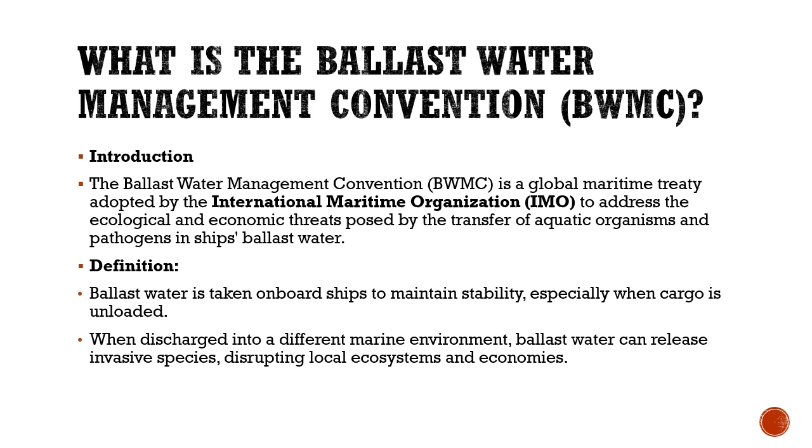What is the Ballast Water Management Convention (BWMC)? Introduction: The BWMC is a global maritime treaty adopted by the International Maritime Organization (IMO) to address the ecological and economic threats posed by the transfer of aquatic organisms and pathogens in ships' ballast water. Definition: Ballast water is taken on board ships to maintain stability, especially when cargo is unloaded. When discharged into a different marine environment, it can release invasive species, disrupting local ecosystems and economies. Objective: The primary goal is to prevent the spread of harmful aquatic organisms and pathogens through ballast water discharge, achieved by mandating ships to either exchange ballast water mid-ocean or treat it to meet specific environmental standards.

Why was it needed? Ecological threats: the introduction of invasive species can harm native marine life, disrupt ecosystems, and threaten biodiversity. Example: zebra mussels in the Great Lakes cause significant ecological and economic damage. Economic costs: invasive species can impact fisheries, infrastructure, and local economies. Human health risks: ballast water can carry waterborne diseases like cholera to new regions. Global impact: the BWMC establishes uniform regulations for all member states, promoting sustainable maritime practices and protecting marine environments worldwide.

Adoption milestone: The BWMC was adopted on the 13th of February 2004, after extensive consultations with IMO member states, scientists, and environmental organizations.

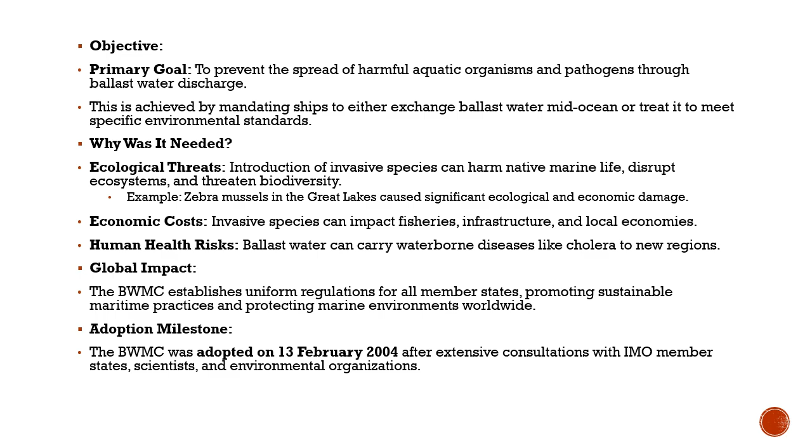History and key dates of the BWMC adoption. Date of adoption: the 13th of February 2004, adopted during the International Maritime Organization (IMO) diplomatic conference, a response to growing concern over the global transfer of harmful aquatic species through ships' ballast water. Ratification milestone: the BWMC required ratification by 30 countries representing 35% of global merchant shipping tonnage to enter into force. This was achieved on the 8th of September 2016, with 52 countries representing 35.14% of the world's tonnage ratifying the convention. Entry into force: the convention officially came into effect on the 8th of September 2017, one year after reaching the ratification threshold. Ships were required to start meeting the D1 ballast water exchange standard from that date.

Amendments to the BWMC: 2018 - IMO introduced amendments to clarify compliance and inspection processes. 2019 - additional amendments addressed the implementation schedule for ballast water treatment systems (D2 standard), and the transition period from D1 to D2 was extended for older vessels to ease compliance. 2020 - IMO revised guidelines for testing ballast water management systems (BWMS), with enhanced focus on performance and sustainability of treatment technologies.

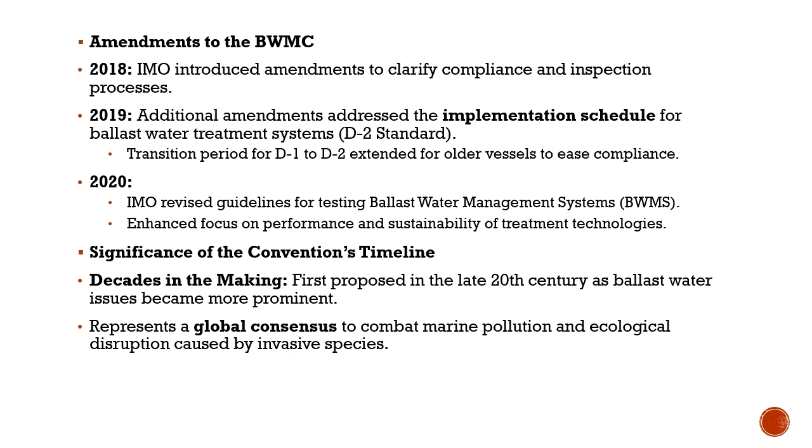Significance of the convention's timeline: decades in the making, first proposed in the late 20th century as ballast water issues became more prominent. It represents a global consensus to combat marine pollution and ecological disruption caused by invasive species.

Scope of the Ballast Water Management Convention (BWMC). Applicability: the BWMC applies to vessels engaged in international voyages to regulate ballast water discharge and prevent the transfer of invasive species. Who does it apply to? Commercial vessels designed to carry and discharge ballast water, including cargo ships, oil tankers, container ships, and bulk carriers - this includes both new and existing vessels. Global coverage: the BWMC sets international standards for all ratifying member states, ensuring uniform compliance.

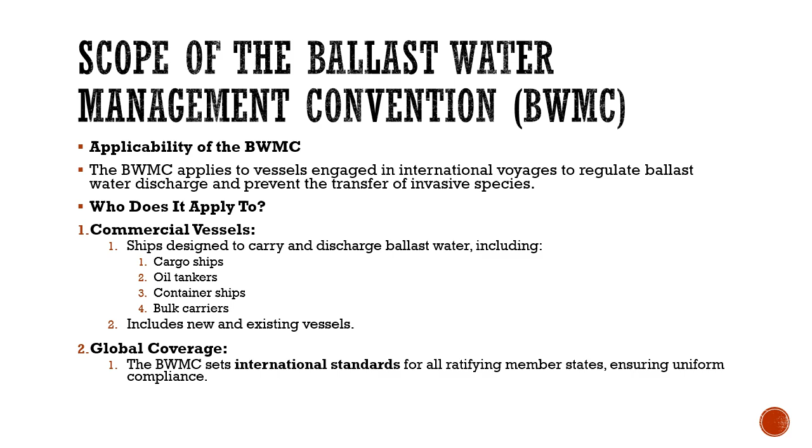Who is exempt? Ships operating exclusively in the waters of one country (domestic voyages); warships, naval auxiliaries, and state-owned vessels used for non-commercial purposes; vessels with permanently sealed ballast water tanks not subject to discharge; and ships that discharge ballast water to a reception facility meeting IMO standards.

Goals of the BWMC: protect marine environments by minimizing ecological harm, preventing the spread of invasive species, promoting sustainability, and ensuring maritime activities do not disrupt ecosystems. It also aims at standardizing compliance by establishing clear rules for ballast water management globally. Legal and geographical scope: jurisdiction applies to ships operating between countries that are signatories to the BWMC, enforced by Port State Control (PSC) in member states. Ships can be inspected, and penalties may be imposed for non-compliance.

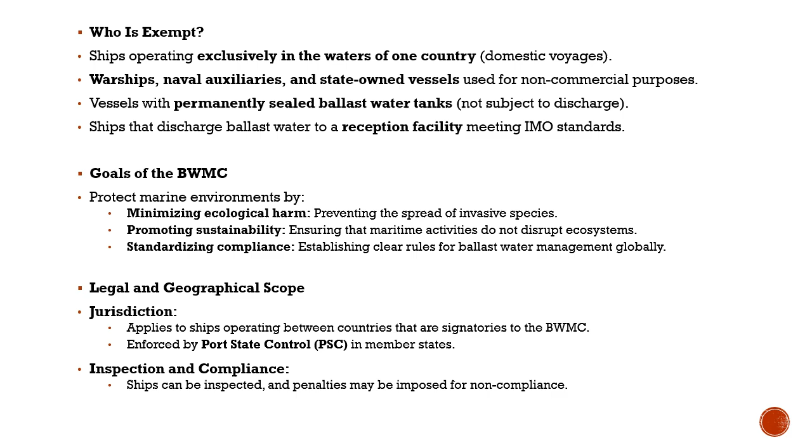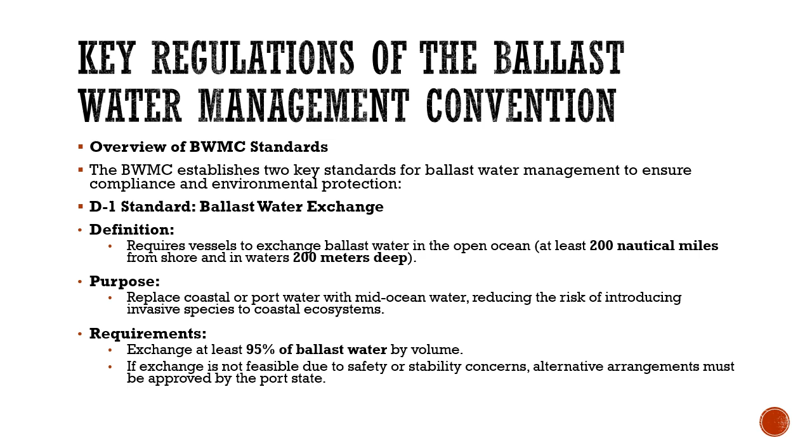Key regulations of the Ballast Water Management Convention. Overview of BWMC standards: the BWMC establishes two key standards for ballast water management to ensure compliance and environmental protection. D1 standard - ballast water exchange: requires vessels to exchange ballast water in the open ocean, at least 200 nautical miles from shore and in waters 200 meters deep. Purpose: replace coastal or port water with mid-ocean water, reducing the risk of introducing invasive species to coastal ecosystems. Requirements: exchange at least 95% of ballast water by volume. If exchange is not feasible due to safety or stability concerns, alternative arrangements must be approved by the port state.

The D2 standard defines ballast water treatment, requiring ships to treat ballast water to meet specific environmental standards before discharging. Performance criteria set maximum concentration limits for viable organisms: for organisms 50 micrometers and larger, less than 10 organisms per cubic meter; for organisms between 10 and 50 micrometers, less than 10 viable organisms per milliliter.

There are also strict limits on harmful bacteria such as cholera, E. coli, and intestinal enterococci. As for the implementation timeline, new vessels must comply upon delivery, while existing vessels must retrofit their systems within specified timelines as per IMO amendments.

Compliance and documentation requirements include the Ballast Water Management Plan (BWMP) — ships must have an IMO-approved plan detailing procedures for ballast water exchange or treatment. The Ballast Water Record Book must record all ballast water operations, including intake, exchange, treatment, and discharge. Additionally, the International Ballast Water Management Certificate is issued by flag states to demonstrate compliance with BWMC standards.

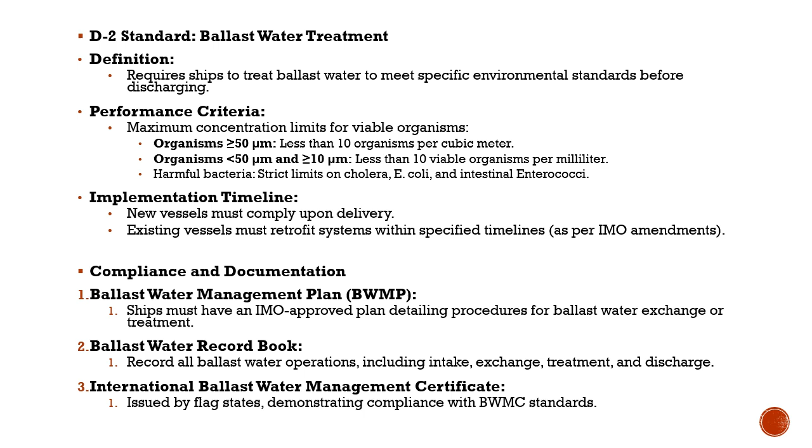Port State Control (PSC) inspections cover the scope of verifying a valid BWMP and ballast water record book, along with sampling of ballast water discharge to ensure compliance with D2 standards. Penalties for non-compliance include fines, detention, or denial of port entry for ships violating regulations.

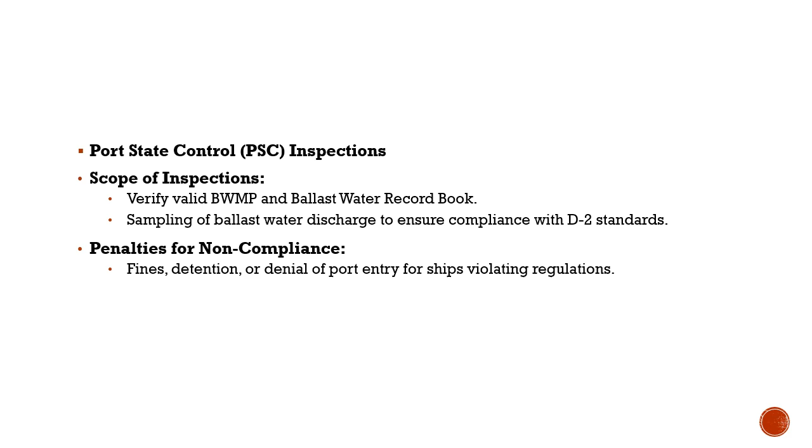IMO requirements for ballast water management. Overview of IMO's role: the International Maritime Organization (IMO) establishes and oversees regulations under the BWMC to ensure global compliance and uniform standards for ballast water management.

Key IMO requirements include an approved Ballast Water Management Plan (BWMP). Ships must have a plan approved by the flag state detailing procedures for ballast water exchange or treatment, safety measures for crew and environment during ballast operations, and emergency procedures in case of equipment failure. The BWMP must be accessible on board for inspections.

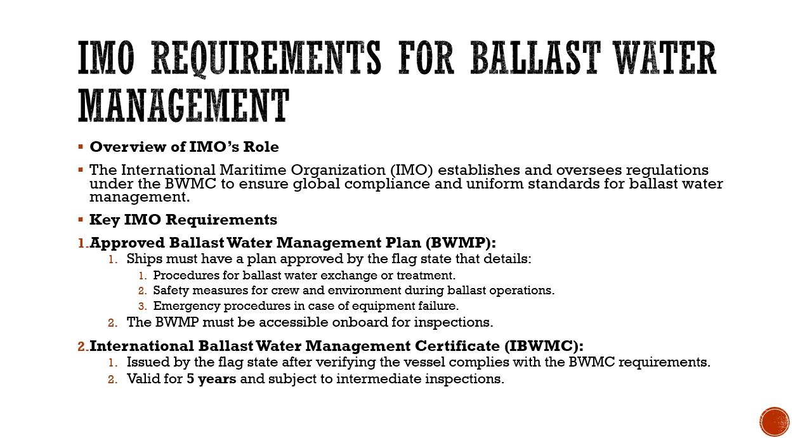The International Ballast Water Management Certificate (IBWMC) is issued by the flag state after verifying the vessel complies with BWMC requirements. It is valid for 5 years and subject to intermediate inspections.

The Ballast Water Record Book (BWRB) must document every ballast water operation, including ballast water intake and discharge, ballast water exchange or treatment, and emergency procedures and deviations, if any.

Treatment technology approval requires ships to install and use an IMO-approved Ballast Water Treatment System (BWTS) to meet the D2 standard. The system must pass rigorous testing for efficacy, reliability, and environmental safety.

Inspection and enforcement falls under Port State Control (PSC). Port authorities can inspect ships to ensure compliance, and sampling of ballast water discharge may be conducted to verify adherence to D2 standards.

Penalties for non-compliance include fines or detention, and denial of port entry. Regarding the implementation timeline, new ships must comply with D2 standards upon delivery, while existing ships comply as per retrofit schedules, marking the transition from D1 to D2.

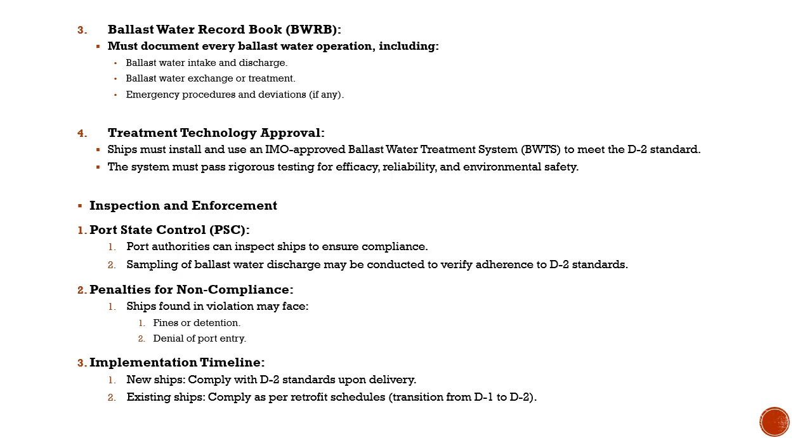A detailed explanation of the D1 standard: ballast water exchange. What is the D1 standard? The D1 standard of the Ballast Water Management Convention (BWMC) requires ships to conduct a ballast water exchange during their voyages. This process aims to replace coastal or port water, which may contain harmful organisms, with open ocean water, reducing the likelihood of transferring invasive species to new environments.

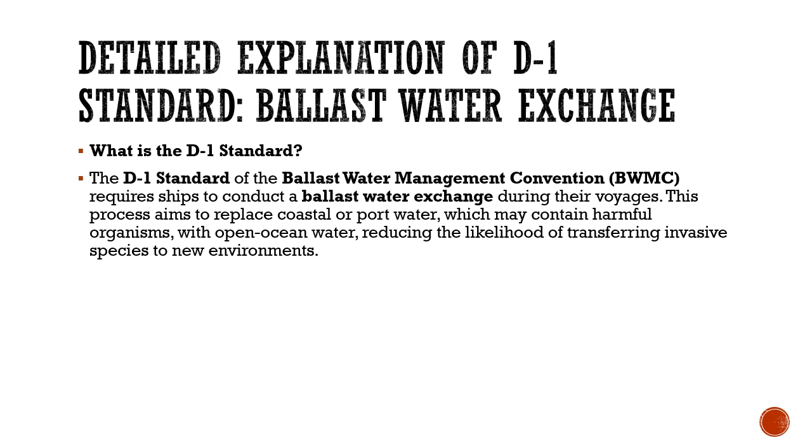Ballast water exchange process and requirements. Location: the exchange must occur at least 200 nautical miles from the nearest land, mid-ocean, in waters that are 200 meters deep or more. Volume: ships must exchange at least 95% of ballast water by volume.

The remaining 5% can be treated, as it is often contaminated with debris, sediments, and organisms.

Techniques for ballast water exchange include flow-through exchange, where water is pumped out from the ballast tanks and new water is simultaneously taken in. This is typically used when the vessel is in open waters, ensuring that the ballast tanks are fully flushed.

Sequential exchange involves emptying ballast tanks in sequence and then filling them with open ocean water, replacing most of the coastal ballast water. Mixed water exchange is a hybrid technique using a combination of flow-through and sequential exchange methods.

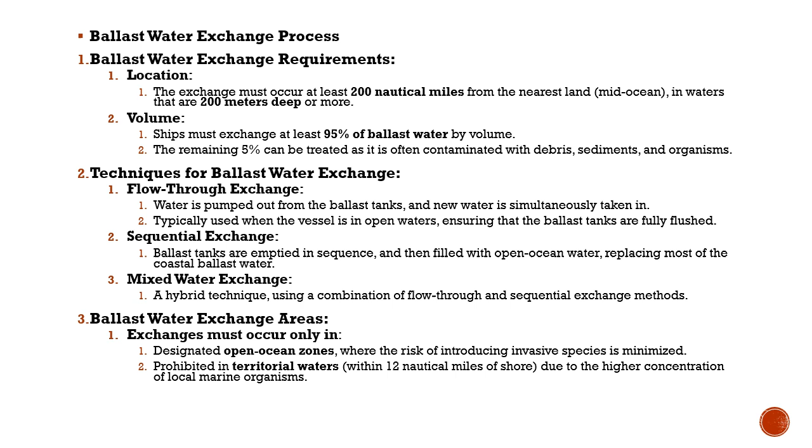Ballast water exchange areas: exchanges must occur only in designated open ocean zones, where the risk of introducing invasive species is minimized. It is prohibited in territorial waters, within 12 nautical miles of shore, due to the higher concentration of local marine organisms.

Who can use the D1 standard? Vessels eligible for D1 compliance.

Existing ships. Vessels built before the entry into force of the BWMC, the 8th of September 2017, can continue to use the D1 standard until they are required to install a treatment system or meet D2 standards based on their retrofit schedules.

Ships operating in specific conditions. Some vessels that operate exclusively in one country's waters, domestic voyages, or those that have sealed ballast tanks may be exempted from the D2 treatment system but are still required to exchange ballast water according to the D1 standards.

Restrictions on use of D1. Ships on domestic routes. Ships operating only in national waters that are not involved in international trade may be exempt from the D1 requirement, but international vessels must follow the D1 exchange process.

Limited by safety. If the ballast water exchange process would compromise the safety or stability of the vessel, alternative arrangements, for example, using an approved ballast water treatment system, may be allowed with port state approval.

Advantages and challenges of the D1 standard. Advantages: effective in reducing invasive species. The exchange process helps to significantly reduce the risk of transporting harmful aquatic organisms to new locations.

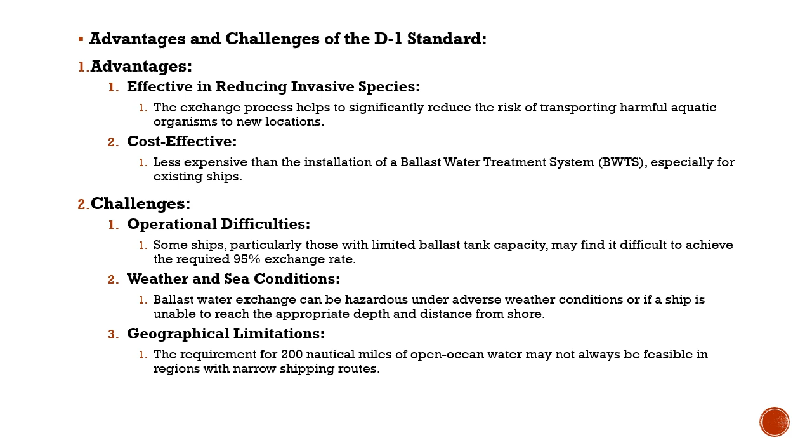Geographical limitations. The requirement for 200 nautical miles of open ocean water may not always be feasible in regions with narrow shipping routes.

Detailed explanation of D2 standard, ballast water treatment. What is the D2 standard?

The D2 standard of the Ballast Water Management Convention, BWMC, sets the requirements for treating ballast water before it is discharged into a new marine environment. The goal is to reduce the concentration of harmful organisms and pathogens to levels that do not pose a risk to marine ecosystems, human health, or local economies.

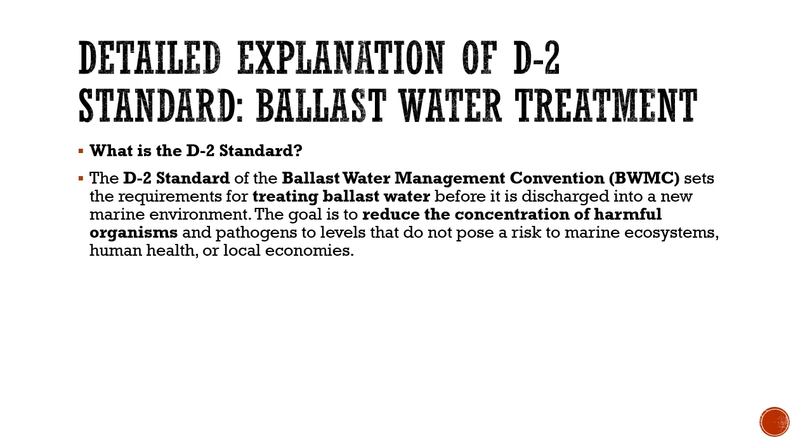D2 Treatment Requirements Performance Criteria. The D2 standard specifies the maximum permissible concentrations for various organisms and pathogens in the discharged ballast water.

Organisms greater than or equal to 50 micrometers, including zooplankton, maximum concentration 10 organisms per cubic meter. Organisms less than 50 micrometers and greater than or equal to 10 micrometers, including phytoplankton, maximum concentration 10 viable organisms per milliliter.

Harmful bacteria, E. coli, maximum of 250 CFU/100 milliliters. Intestinal enterococci, maximum of 100 CFU/100 milliliters. Vibrio cholerae, maximum of 1 CFU/100 milliliters.

Ballast water treatment systems, BWTS. Ships must install and use IMO-approved ballast water treatment systems to meet D2 standards.

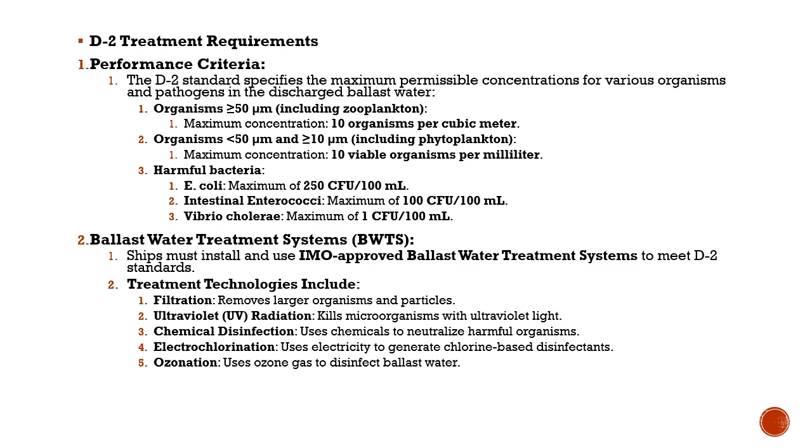Treatment technologies include filtration, which removes larger organisms and particles; ultraviolet (UV) radiation, which kills microorganisms with ultraviolet light; chemical disinfection, which uses chemicals to neutralize harmful organisms; electrochlorination, which uses electricity to generate chlorine-based disinfectants; and ozonation, which uses ozone gas to disinfect ballast water.

Compliance deadlines for D2. New ships comply with D2 immediately upon delivery from the shipyard. They must have an IMO-approved ballast water management plan, BWMP, and ballast water treatment system, BWTS, in place from the beginning.

Existing ships must install a BWTS to comply with D2 standards during the first scheduled dry docking after the 8th of September 2017, or by the following deadlines: by 2022 for ships built before the entry into force of the Convention, and by 2024 or 2027 for vessels over 400 gross tons or those subject to extensions.

Installation and operational considerations. Retrofit challenges for existing ships. Retrofitting ships with a BWTS can be expensive and technically challenging. Ships must undergo modifications to accommodate the treatment system, which may include installing new pumps, power systems, and storage tanks.

Maintenance and monitoring. Regular maintenance of the BWTS is crucial for ensuring the system's ongoing effectiveness. Operational staff must be trained to monitor and operate the BWTS, ensuring it functions within the prescribed limits for treatment efficiency.

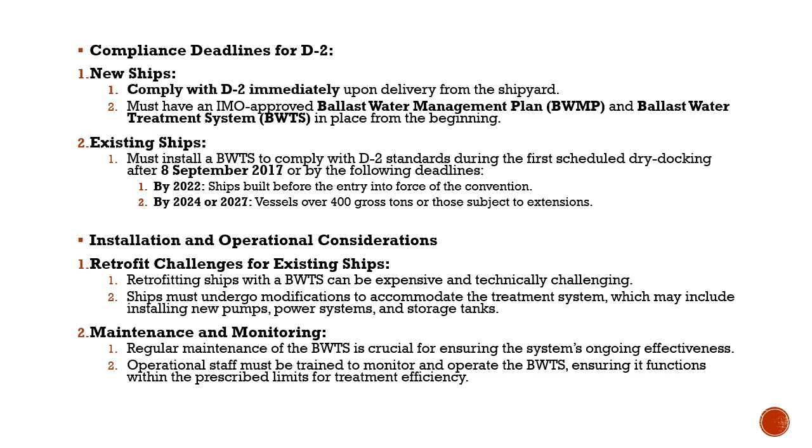Advantages of the D2 standard. Effective for reducing harmful organisms. The treatment system ensures that harmful pathogens and aquatic species are killed or rendered incapable of surviving in new environments.

Environmental protection. Significantly reduces the risk of introducing invasive species that can cause ecological and economic damage. Global standardization. Uniform international regulations prevent the risk of non-compliance in different countries and ensure that all ships meet the same standards.

Challenges of the D2 standard. Cost of technology. The initial cost of installing and maintaining an IMO-approved ballast water treatment system can be high, especially for existing ships. Technological limitations.

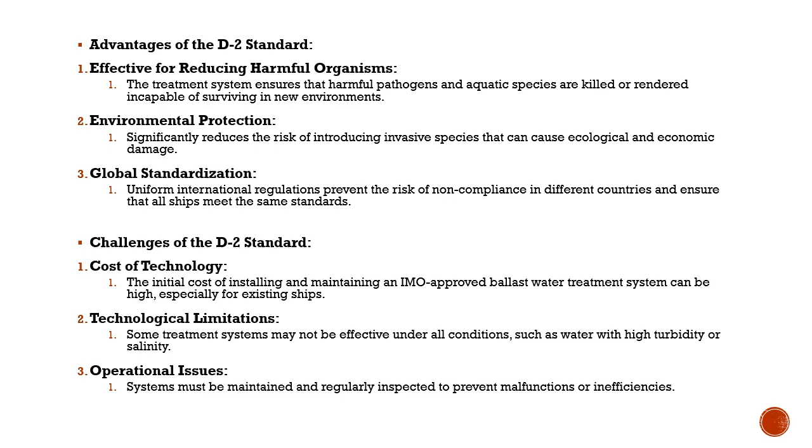Some treatment systems may not be effective under all conditions, such as water with high turbidity or salinity. Operational issues. Systems must be maintained and regularly inspected to prevent malfunctions or inefficiencies.

Challenges and emergency procedures in ballast water management. Emergency contingency measures, exemptions and extensions. Ships that cannot comply with ballast water exchange or treatment due to technical difficulties may be granted temporary exemptions or extensions. These must be approved by the flag state and port state, and the ship must provide a contingency plan for ballast water management until compliance is restored.

Port State Control, PSC, inspections. If a vessel is found to have an inoperative BWTS or is in violation of the D2 standard during a PSC inspection, immediate corrective actions will be required. The ship may be detained or fined, and further corrective measures may be required, including installation of a new BWTS or additional ballast water treatment equipment.

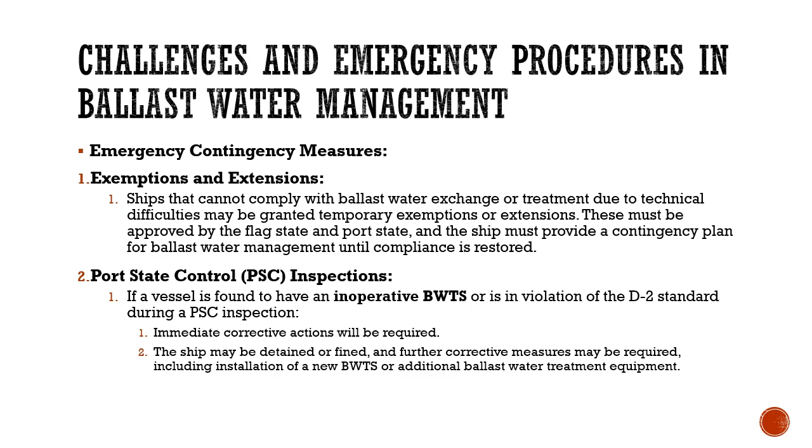Challenges in ballast water management. Operational difficulties. Space constraints. Some vessels may face space limitations when installing ballast water treatment systems, BWTS, especially older ships with less available room for additional equipment.

Efficiency variability. Ballast water treatment systems may show varying effectiveness under different operational conditions, for example, temperature, salinity, and turbidity levels. Financial and technological barriers. High costs. The installation and ongoing maintenance of BWTS can be costly for shipping companies, particularly for older vessels that require retrofitting. Technological reliability. Some treatment systems may not meet the required discharge standards in extreme conditions, causing compliance issues.

Environmental and geographical limitations. Ballast water exchange restrictions. Ships are required to conduct ballast water exchanges only in mid-ocean, at least 200 nautical miles from shore. In regions with congested shipping routes or short-distance international trade, this requirement may not always be practical. Extreme weather conditions. Adverse weather or sea conditions may make it difficult or unsafe to perform ballast water exchange, impacting compliance.

Compliance monitoring and enforcement issues. Inconsistent enforcement. Enforcement of ballast water management regulations may vary by port state, leading to inconsistent compliance across regions. Inspection and sampling challenges. Sampling ballast water to verify compliance can be difficult due to the complexity of monitoring and testing, especially for ships that use chemical treatment or electrochlorination methods.

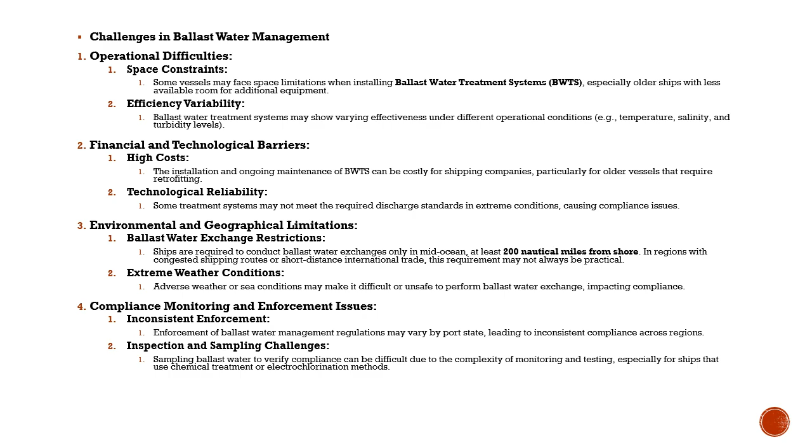Emergency procedures for ballast water management. Malfunctioning ballast water treatment system, BWTS. Immediate actions: if a BWTS is not functioning correctly, the ship's crew must immediately notify the port state or relevant maritime authorities. Alternative ballast water management procedures, such as ballast water exchange, D1 standard, may be authorized. Temporary measures: some ships may be allowed to discharge ballast water into reception facilities that are designed to handle ballast water and ensure it is treated properly before release.

Failure to meet D2 standards. If the ship is unable to treat ballast water to the required D2 standards due to equipment failure or other issues, the ship should seek immediate approval from the port state for an alternative compliance plan. Emergency treatment methods, such as additional filtration or chemical dosing, may be permitted, subject to approval.

Ballast water discharge in restricted areas. In cases where the ship needs to discharge ballast water in restricted waters, due to navigational challenges or unforeseen circumstances, the ship should follow special discharge protocols as specified by the IMO or relevant maritime authority. Notify the relevant authorities and provide a report explaining the emergency discharge situation.

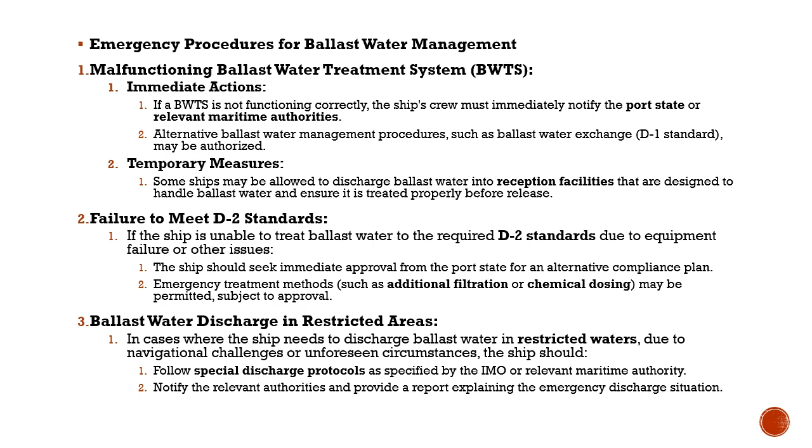The future of the Ballast Water Management Convention. Ongoing developments. Technological advancements: development of smarter, more efficient ballast water treatment technologies. Increased use of AI and machine learning for real-time monitoring and predictive maintenance of BWTS.

Stricter regulations. The IMO is considering stricter enforcement and updates to the BWMC to ensure higher standards of environmental protection. Implementation of data collection and analysis systems to improve compliance.

Global harmonization. Efforts to standardize ballast water management practices and technologies across all regions, reducing discrepancies in enforcement and ensuring global uniformity. Environmental impact monitoring. Ongoing research into the long-term effects of ballast water treatment on marine ecosystems to refine the standards further.